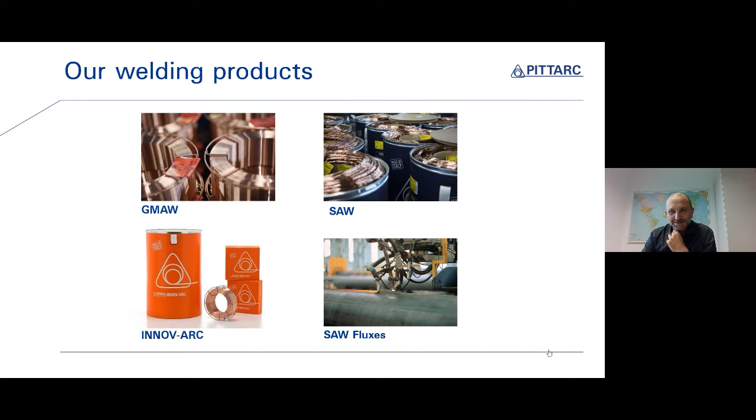Okay, Nord Stream is one of the most interesting projects in the world. Also, part one has been in operation for many years, for two main reasons. One is because it's an offshore project that connects Russia with the northern part of Germany. The length of each pipeline is more than 1,200 kilometers.

Talking about Nord Stream 2, we also have to spend some words on Nord Stream 1. The idea of Nord Stream 1 was born in 1997 by a joint venture of Neste Oil, Finland, and Gazprom. From 2003, Gazprom was the only owner of the idea, because at the time it was only an idea — an idea to connect Vyborg in Russia with Greifswald in northern Germany.

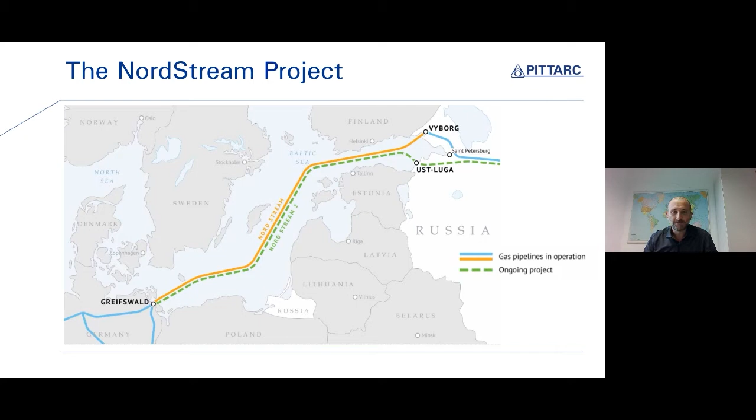More or less 150, 160 kilometers of pipe are missing from the sea to the German gas station. But we think that the main owner is planning to be in operations within the end of this year. It's almost done project, right? Yeah, exactly, we are not so far from it.

And also about some numbers, as I told you, each line of the project, because Nord Stream 1 and Nord Stream 2 have got exactly the same technical characteristics. The only difference is the onshore part, because in the Nord Stream 2 there are also 800 kilometers of pipes outside the water in Russian territory, and PITTARC participated and also supplied this part of the project.

As I told you before, the length of the pipeline is impressive. Each pipeline, because Nord Stream 2 is based, as the first part of the project, on a twin line of pipelines, more than 1,200 kilometers each line. We are talking about - if I understand well, I have to multiply by 4, right? Correct, in order to have Nord Stream 1 and Nord Stream 2.

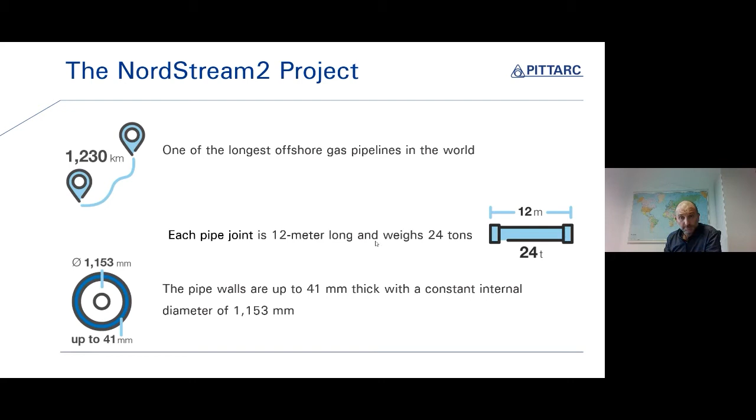And as I told you before, when the Nord Stream 2 goes into operations, more than 40% of the gas that Europe needs will come directly from Russia. This is very impressive for us, and for sure this is the reason why Nord Stream, the first part and the second one, is so popular and so important all around the world.

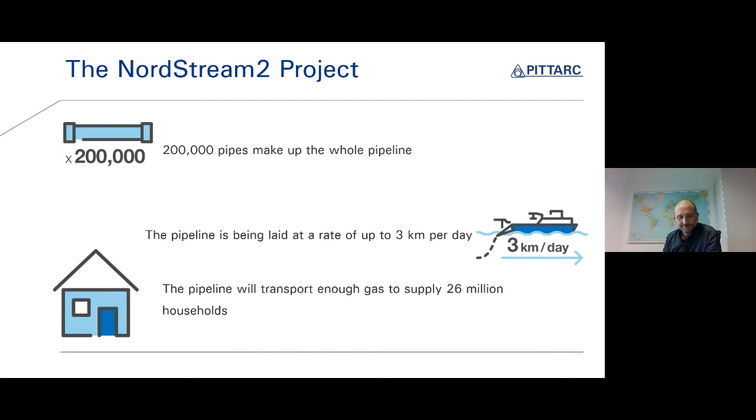Thanks very much for this interesting overview. Now it's more clear what Nord Stream is. We always hear about it, but now it's definitely clear. I can guess the role of Peter, but you better explain it now, right?

Okay, we are producing welding wires, so we supplied part of the welding wires of the whole project. In particular, we are talking about more or less 1,000 tons of welding wires in grades S2Mo, S3TiB, and S3MoTiB grades.

For sure, the choice of the wire comes from the engineering before, and by the pipe mills. The role of PITTARC was to support our customers, the pipe mills, in order to confirm the selection of the right grades, and within each grade, to support them with the dedicated chemistries. Because every customer - and we will go deeper into this in the last part of this presentation - each customer has got a dedicated technique to produce the pipe. So maybe not every time, but sometimes they need some dedicated chemistry of the wire rod, the welding wire, in order to perform in a better way the final welding bead.

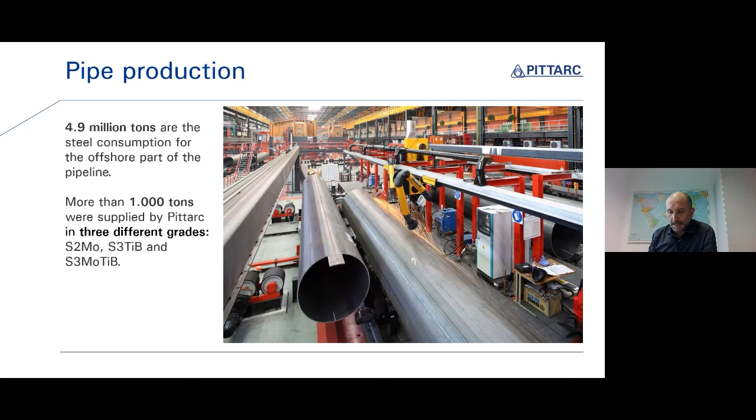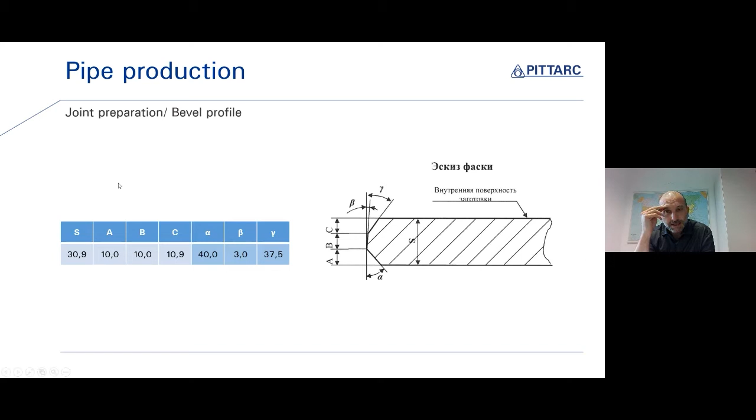Our end users, the pipe mills that we supplied: this is a joint preparation of the base material. They used a multiple wire technique with 4 wires as inside welding and 5 wires as outside welding. This is the characteristic position of the wires.

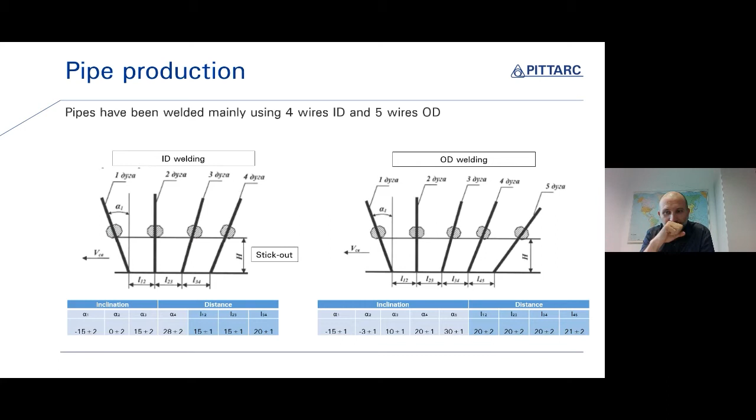In the inside one, for sure, you don't have to lose pressure, right? Exactly. To avoid also any change in the flow of gas. Otherwise, imagine some 1,200 kilometers of friction, it's a long way. Exactly, absolutely, it's a long way. Okay, you're right.

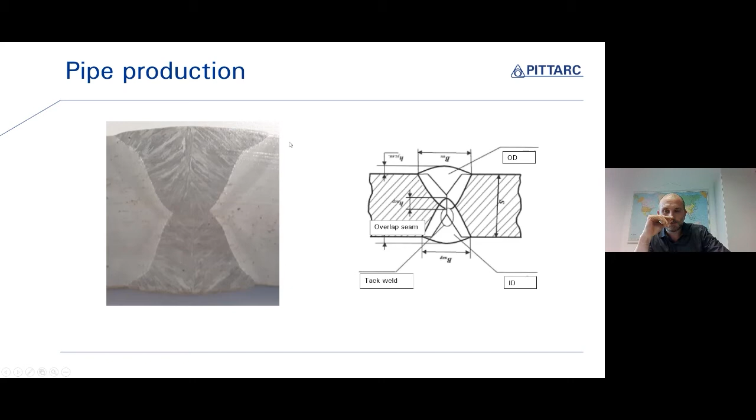We talk about pipe production, but I think jointing pipes is also part of welding, right? Yeah, but okay, we have to be clear at this point. Jointing: in submerged welding technique, you can join the pipes outside of the water on the vessel. Okay. So on the vessel you prepare two pipes joined together, and this junction is done in submerged welding technique.

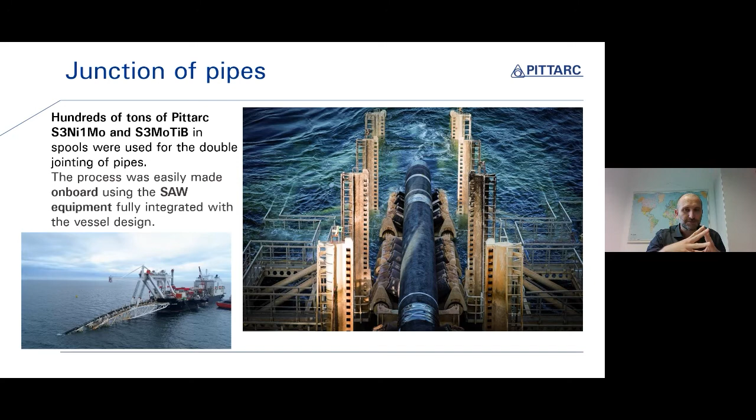Also for this part of the project, we supplied some wire, two grades mainly, the nickel moly wire and the moly titanium boron wires, in diameter in this case 2.4 and 3.2. The particular thing about this part of the project was the packaging, another area where PITTARC has got a long experience.

In fact, you have to consider that this wire used for the junction of the pipes is in spool configuration, 27 kgs, and has to be transported on the vessel that is in the middle of the Baltic Sea. So the weather conditions were not exactly standard weather conditions, and so we performed a dedicated packaging with barrier bags.

So we put the welding wire into a wooden box, and the wooden box was completely packaged by barrier bags in order to avoid any kind of possible corrosion by weather conditions or something similar, in order to be protected from our warehouse to the final destination, that in this case was the vessel.

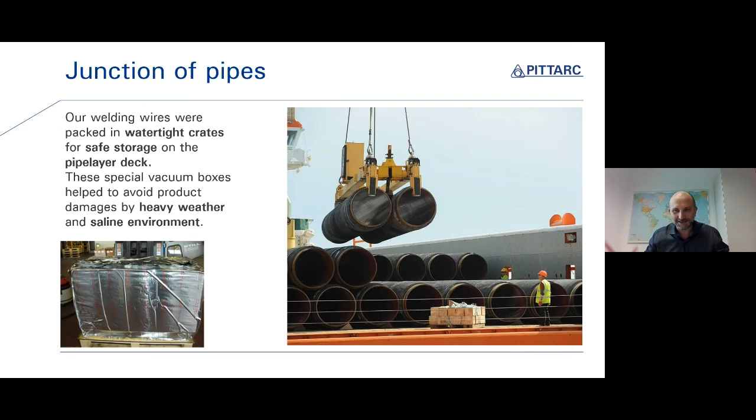Yeah, so I see personalization both in wires, in the chemical aspect of the wires, and also in packaging. So a big range of personalization for the pipeline. Yeah, we have to have this approach, Flavio. Otherwise, okay, we are specialized in only two products in the welding field. We absolutely have to do it in the best way that we can. That introduces my question: what kind of customization have you made for pipe mills?

Pipe mills are one of our historical customers. If you consider that, in terms of submerged welding wire, PITTARC is able to produce 16,000 tons of submerged welding wire per year at the moment, more or less half of this production is produced for the pipe mills, and we started this collaboration more than 25 years ago. So we developed our technology and studied with the end user the best solutions in terms of packaging.

As we talked before, we started with 350 kg drums. After that, we produced the 600 kg drums, and with the new line that will be installed in the next months and be in operation in September, October of this year, we will also be able to produce the welding wire in 1,500 kg drums, so 1.5 tons for each drum.

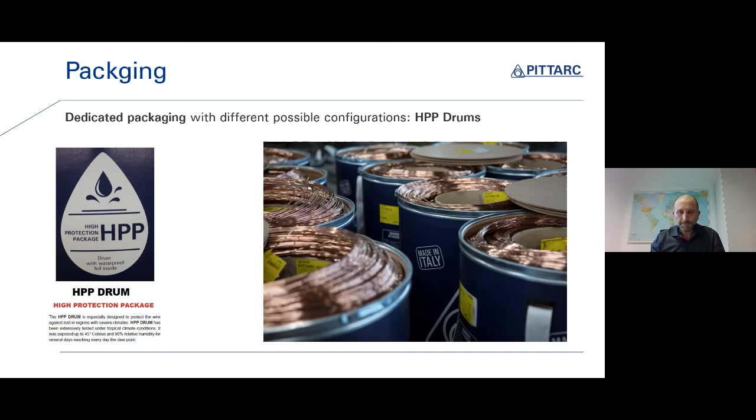Also in this case, we are able to protect the wire in a good way, in order to avoid any problem during the transportation of the wire, and consider that we are working with our customer in order to save time on changeover.

This is the reason we started with one drum of 350 kg, and right now we want to propose to the market the 1,500, and a similar reason is for the 1 ton coils, because the pipe mills are a huge consumer of welding wire, so every operation has to be also optimized in order to avoid any time lost in productivity.

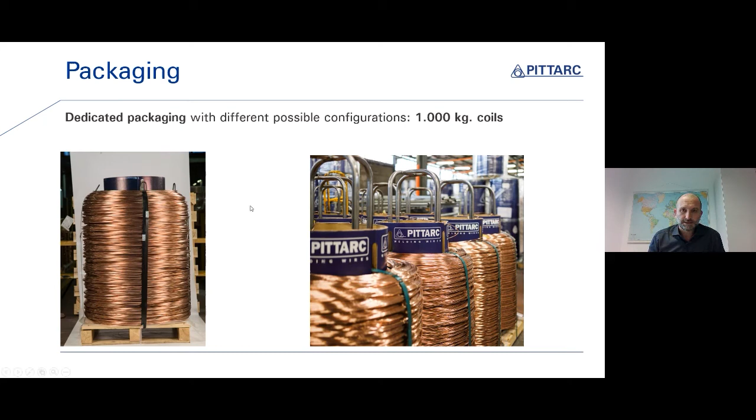And to summarize your interesting talk today, can you give us some reasons why to choose PITTARC? Okay, in my opinion, you have to choose PITTARC if you need solid wires, due to the long experience that we have in this field. Consider that we are supplying about 30 pipe mills all around the world.

Also at the same time, we have enough production capability in terms of submerged arc welding wire and GMA wires in order to cover the requests of the market. Using the wire rod in such big quantity, every time we have different batches of the same grade, and this is in connection with what I anticipated before.

We have mainly the possibility to submit the chemistry before the project to our end users, to our pipe mills, and so they can in some way also choose the grade chemistry that they need. Also, we are able to book big quantities of the same grade for our partners, our customers. In this way, they can have, first thing, a constant quality of the welding process.